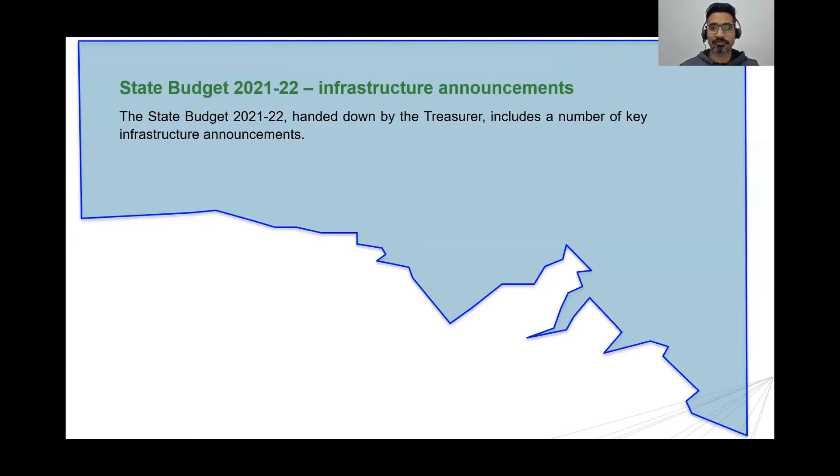So during this state budget 2021 and 22, the government of South Australia has poured a lot of money, around $17.9 billion for the next 4 years. Our state is very small compared to others, so any job bigger than a billion is like a very big job here. As you guys are already aware, South Australia was the third most livable city, which is a surprise. So the government is thinking a lot about how they can keep the name up, with things like how they can support economy and job growth here, and there's also a lot of focus on the regional areas, which is very good.

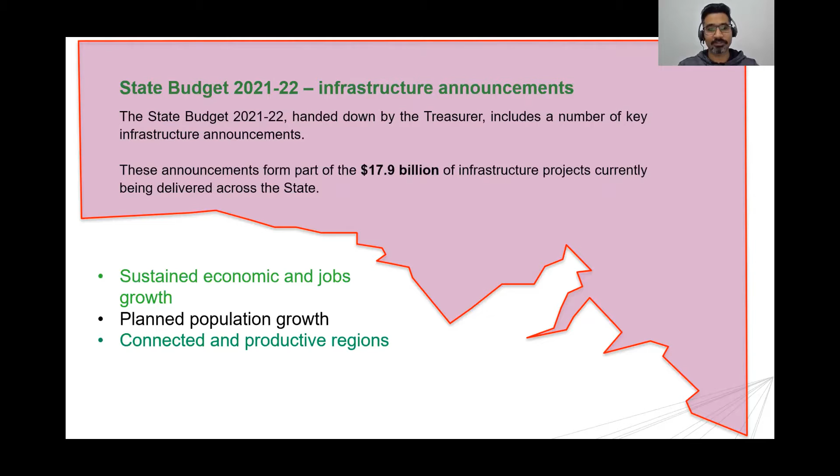So what I did basically, I listed all of the major projects on one page, so you can have a good idea. There are two big departments here in South Australia. The biggest one is DIT, called the Department for Infrastructure and Transport. It's like the biggest giant here in South Australia that runs everything. And the second biggest one is SA Water.

So if you see, number one on the top of the list is basically T2D, named Torrens to Darlington. It is one of the biggest jobs in the history of South Australia, $9.9 billion. What they're trying to do basically is upgrade their motorway. We have one motorway, luckily, in South Australia, with a length of around 78 kilometers, but there is a missing link that goes from the major part of the city, has a lot of traffic lights, and the speed reduces over there. That missing link is 10.5 kilometers.

So the government is trying to do a tunnel project. That will be the second tunnel project in South Australia. In total it will be done in two stages. Stage one will be around $5.5 billion, and stage two will be around 4.5 billion or so. It will be 3 lanes; before that it was 2 lanes, so they just added 1 lane. The cost has jumped to $9.9 billion.

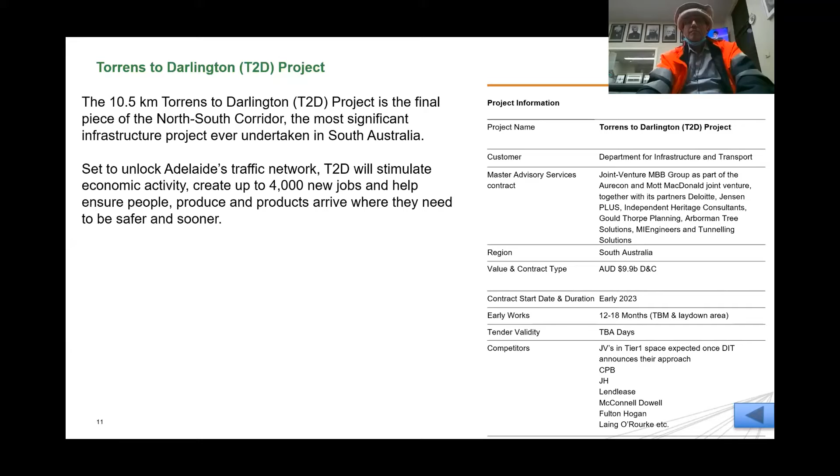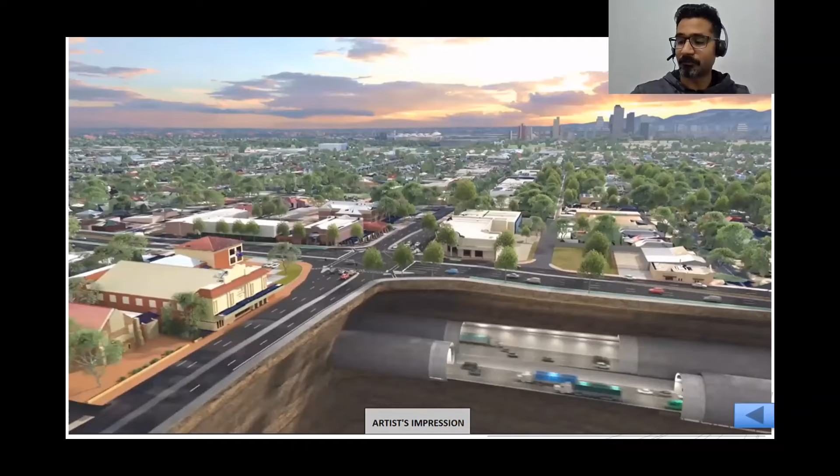This project will create almost 4,000 jobs. It's a twin tunnel, so one on the other side and one on this side. It will be a very good project. For this one, it will start around 2023 and go up to 2030.

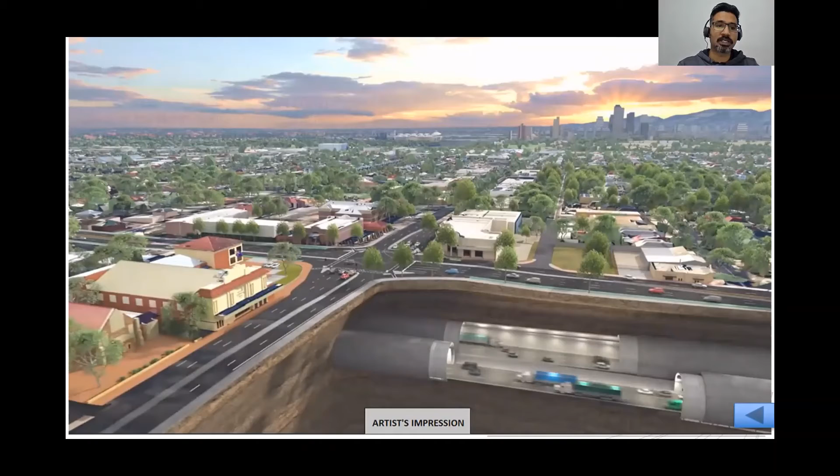For this one, they have acquired the laydown area for the TBM, as TBM consumes a lot of energy. They are already in discussion with SAPN, and I believe they have got all the resources in hand. It will be a very good project for South Australia, helping to boost the economy basically.

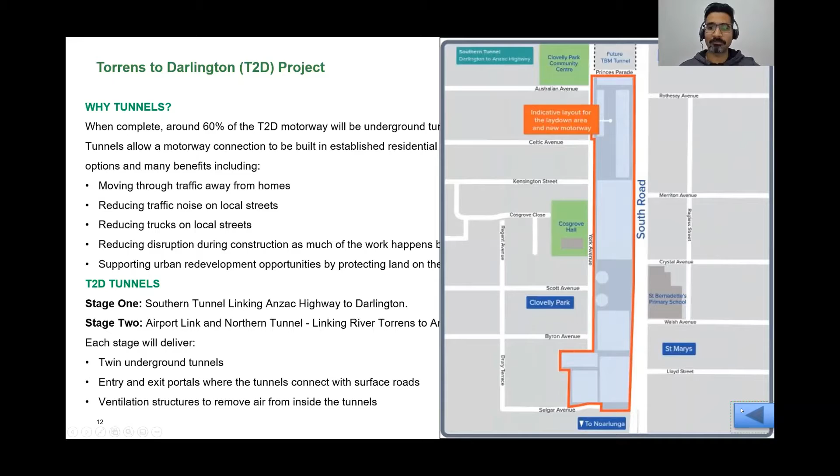The second biggest one will be the Fleurieu Connections. Anyone who has been to the main South Road knows what they're trying to do - duplication for the main South Road and the Victor Harbor road. Both are very important in this regard. It's around $560 million, and it will be D&C. It will start around 2021 and go up to 2023. So it's a good package actually.

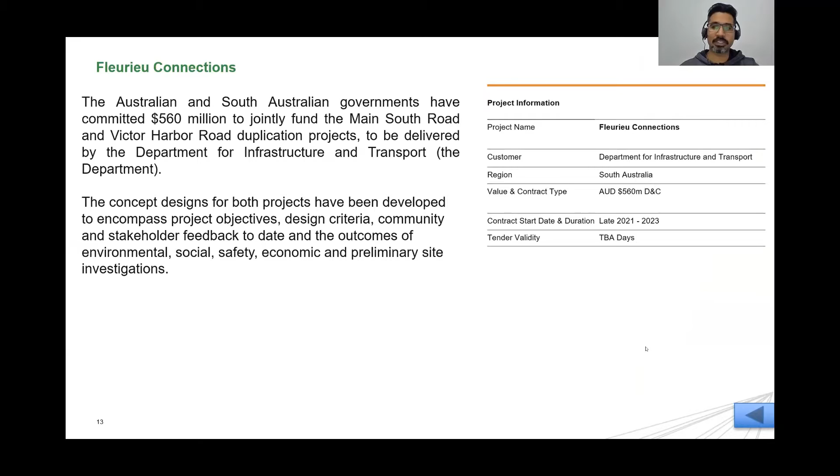So the next one is Heysen Tunnel. There is only one tunnel that we have at the moment. It was built maybe 15 years back, I'm just guessing. As per Australian standards, it doesn't meet the current standards for fire safety. In case there's any fire or blockage in the tunnel, they can't do anything. So they have to upgrade the internal retrofitting for the tunnel.

This project will start almost around 2022. There are a lot of companies like McConnell Dowell, CPB, Acciona. So Laing O'Rourke will be a part of that.

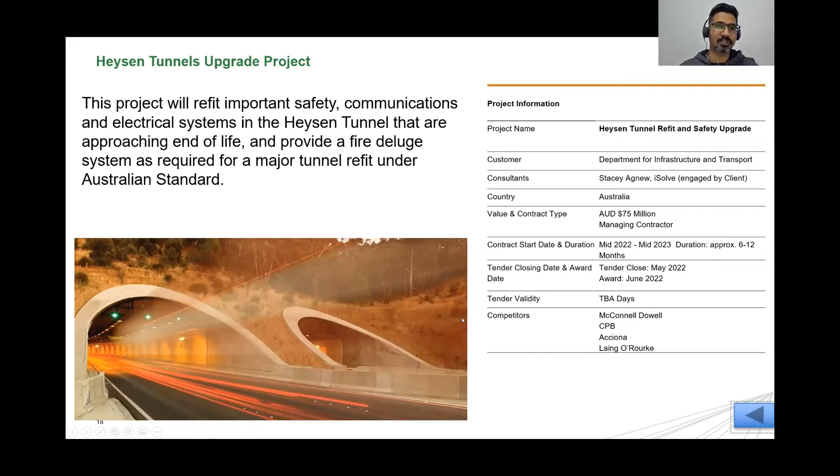So the next one is Hahndorf Freeway. I believe this is a German name, correct me if I'm wrong. It's a $250 million project.

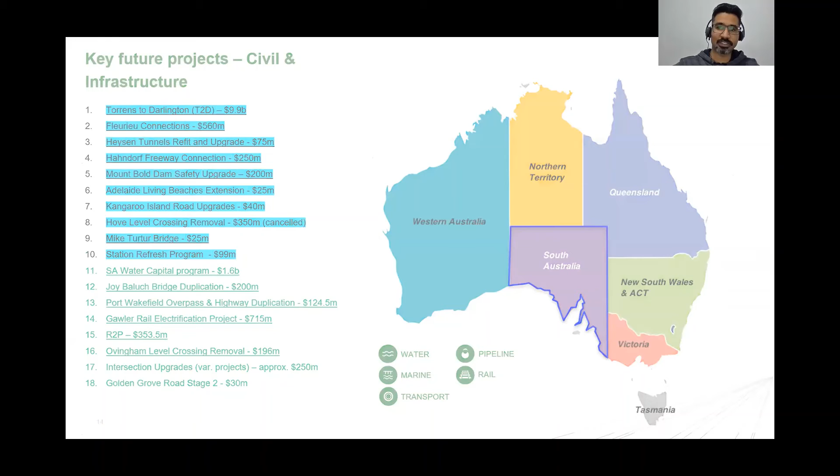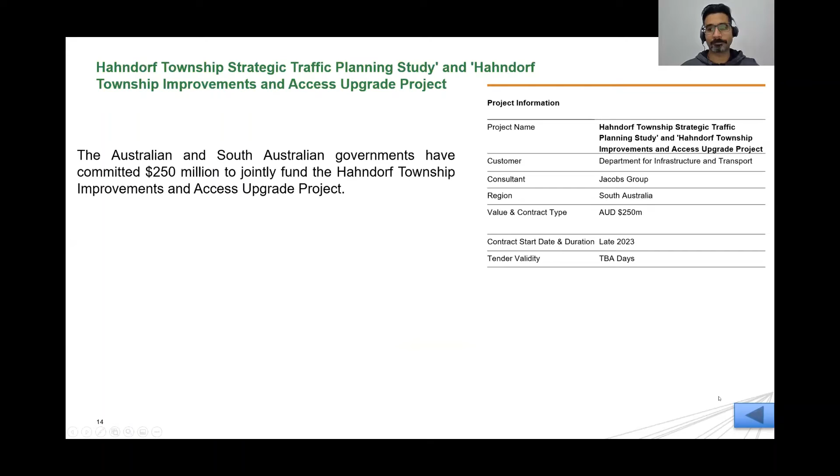In this one, that town is on the east side of Adelaide, but there's also a lot of road trains, the big trucks that basically go to that area. To facilitate that process, they want to connect Hahndorf with the South Eastern Freeway. This project will be $250 million and it will start around year 2023. It's in the initial planning stage at the moment.

The next one is Mount Bold Dam. I'm very interested in this one. I left a message in the group if someone has experience in dam raising projects.

So we have one big dam here in South Australia. The government is committing around $200 million. It will be done by SA Water, South Australian Water Corporation. It will start around 2023, it's a 4-year project. So what basically happens is when there's a lot of water, the dam body can have overtopping, and there are chances it can lead to dam failure.

So they have to raise the dam wall and do some work with the gates in the spillway. In the start there were 3 major companies, now it has been reduced to 2. It will be an ECI job, so it will be versus 2 companies.

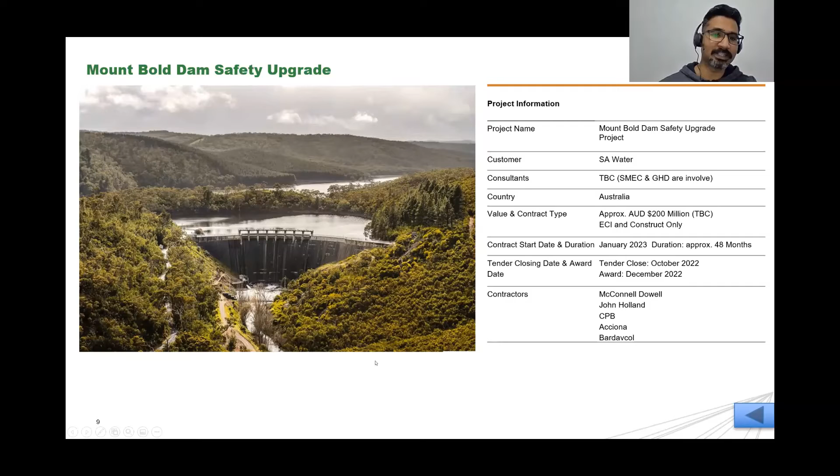The third one and the next ones are small ones, I wouldn't put a lot of effort on this. This one is Adelaide Living Beaches. So what happens in Adelaide or South Australia is the sand from the south side goes to the north side with the sea waves. The government has to cart the sand back to the south side to keep the environment in good condition. So they've already installed a sand pumping system here. It pumps the sand from the northern end and moves it to the southern end, like an automatic system, to keep the environment intact.

Then there's a small job like Mike Turtur Bridge. Then number 10 is the station refresh program. The government is trying to, there are a lot of railway stations, so they're investing more money to facilitate customers over there. It's a small, different packages.

And the next one is SA Water Capital Program. Currently I'm working on this one. It's a 4-year program where SA Water will upgrade their trunk lines, dams, and network system for the next 4 years.

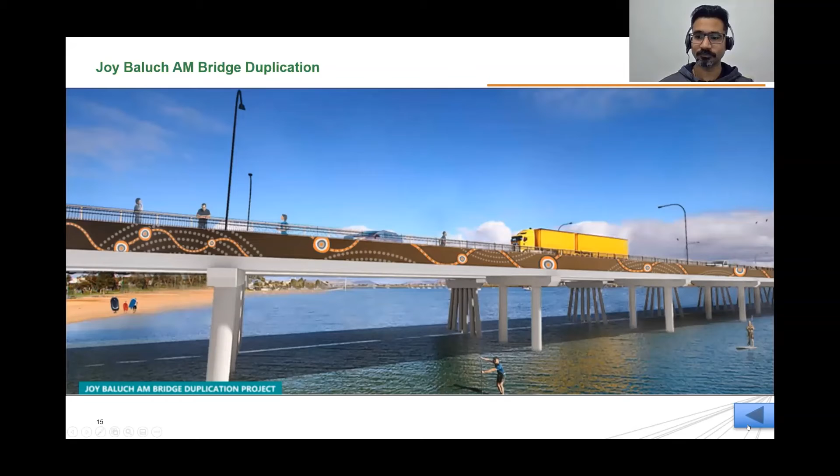So in SA, if someone has to do any works related to water, there's a different pre-qualification for that. I believe that company will come from interstate for all these works.

Then the next one is Port Wakefield overpass and highway duplication. It's with the same company, CPB, it's an alliance PTWPA, I believe.

And the next one is the Gawler rail electrification. All the south side has already got a good system here. So what the government is trying to do is introduce more environmentally friendly trains, 50% on gas and 50% on electricity. This was like a blow-up job for Lendlease, they got trapped in this one.

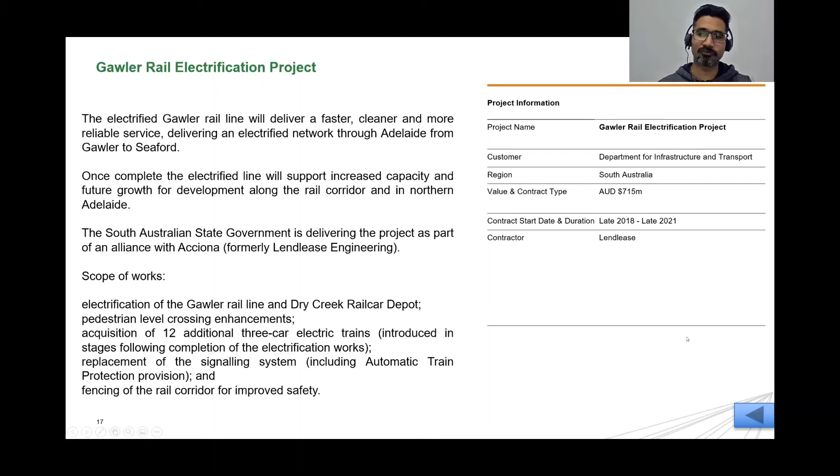So it's a big job for them, but I think the government and Lendlease have some issues with this one. All the infrastructure division for Lendlease has been bought by Acciona now. But there are a few more companies like SC Structures, they got burnt on this one. So they're going for liquidation with the banks at the moment. These will be new trains here. We already have these on the south side, but not on the north side.

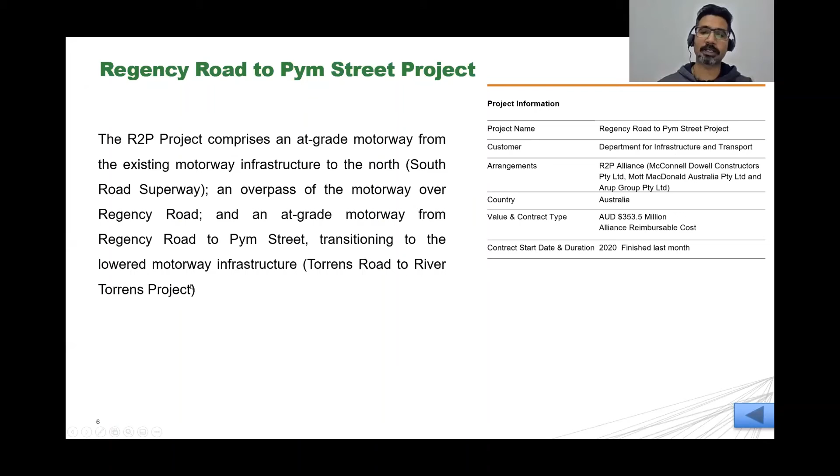The next one is R2P, the Regency to Pym. This was also an alliance between McConnell Dowell, Mott MacDonald, and Arup Group. This job has already been completed, and it was done by McConnell. It's a very fantastic job - they completed it 2 months before the completion period. So DIT, the department, is very happy with them.

The next one they're currently working on is Ovingham, a level crossing. What's happening here, like with the other states, is they're trying to remove those crossings - either with a grade separation or a bridge or something like that - because most of the stations are very close to the city, and we are a festival state. During Feb and March, we call it Mad March, there are a lot of events happening in the city during this period. So they're trying to promote more tourism, and they're working on this one. This will be the new bridge for that.

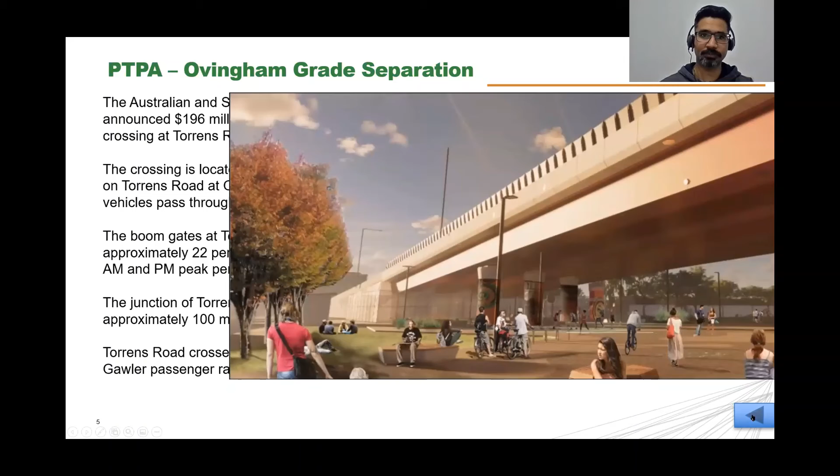What they're trying to achieve is address the growth because there are a lot of immigrants coming to South Australia, so there's a population increase. This means there's a lot of traffic load on the roads, so they're trying to upgrade different intersections. I put an approximate number, $250 million, because there are a lot of intersections. Sorry, I don't have a lot of information about that, but yeah.

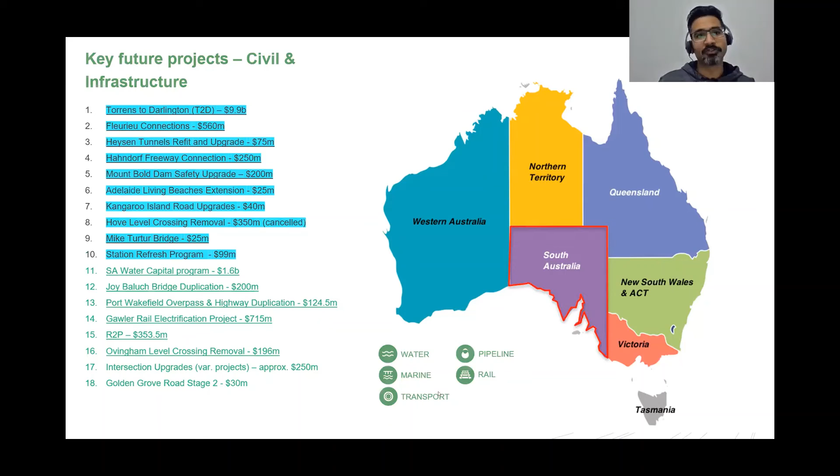Meanwhile, I'll try to cover the building side as well. I'm not a building guy, but I'll try to give you a quick overview of how buildings are working in South Australia. The government poured a lot of money, around $1.2 billion, to upgrade existing schools, and they're trying to build a new women and children's hospital by end of 2027, because the current children's hospital doesn't meet requirements. It will be very close to the RAH, the Royal Adelaide Hospital, on the backside, which was built by CPB and other companies in the past.

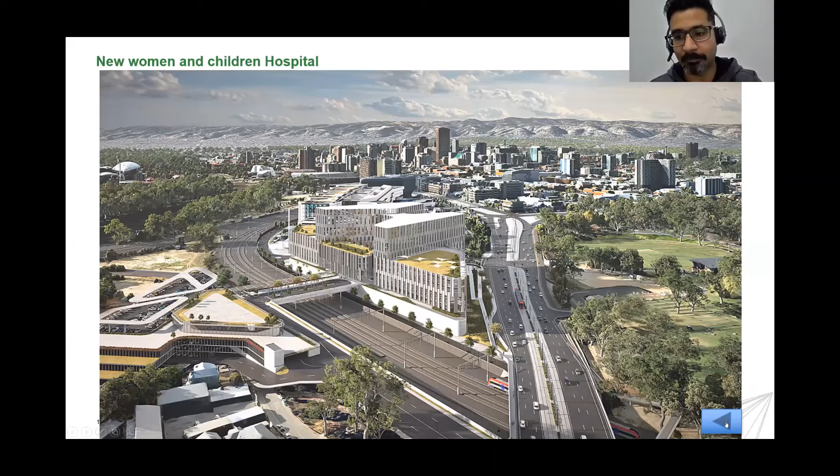The next job is the Australian Bragg Centre. It's basically a proton therapy center, under construction at the moment, around a $500 million job. So it will look like this. It's being built by Lendlease.

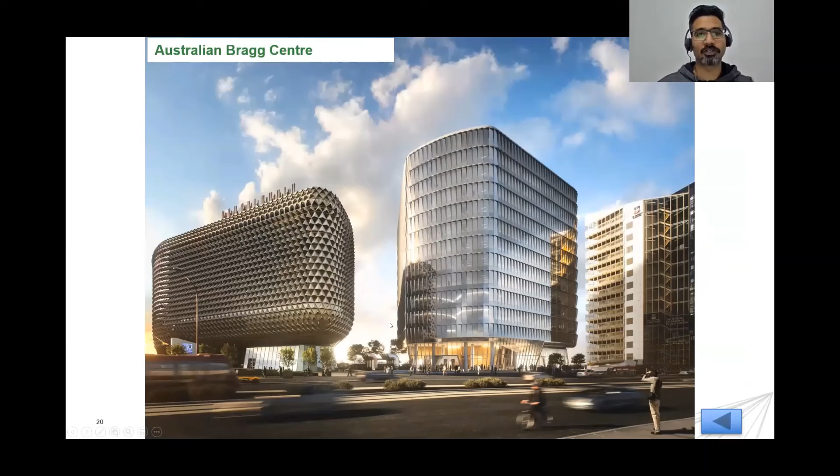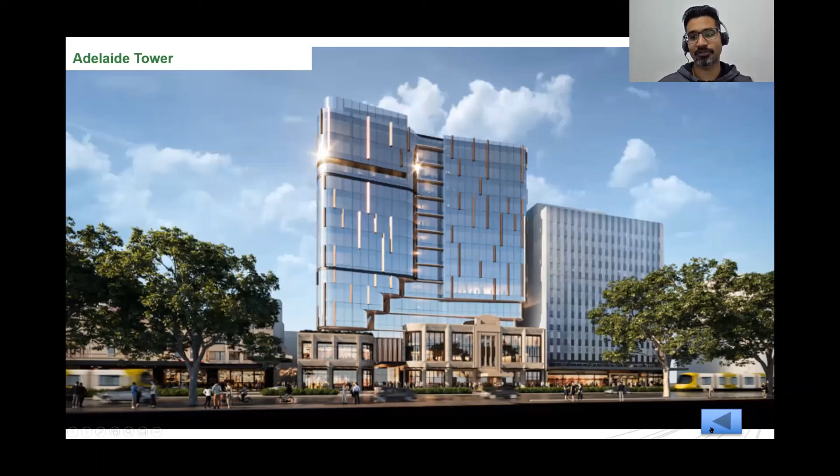The next one is Adelaide Tower, a new tower being constructed - like a 5-star or 7-star hotel in the heart of the city. There used to be an old building over here, and I've never seen any demolition that had such a huge amount of temporary works. It was a fantastic job done by a demolition company, I think an interstate company, Delta.

Then I think someone mentioned the Olympics - the Women's Football World Cup will be held by Australia and New Zealand, and there are chances there will be a few matches here in South Australia. So the government has planned to construct a new arena for that.